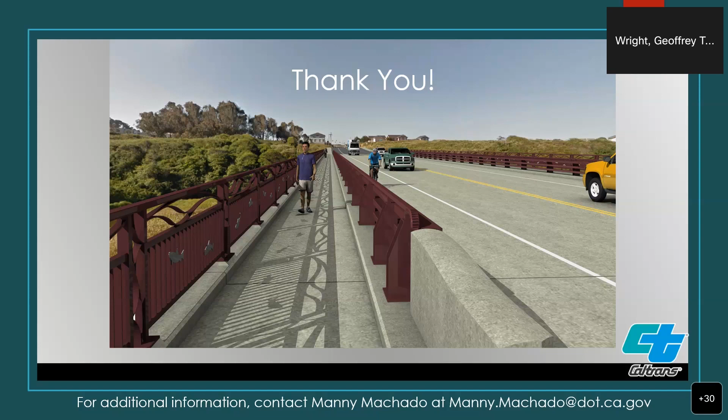Yeah, we probably need to defer to our contractor partner a little bit, but initial conversations with the contractor suggest that if given the notification, depending upon where we are with a critical pick, it could be up to 15 minutes from the time we are notified that we need to make a clearing to allow emergency vehicles to pass, to the time they actually could pass through.

I know there's been also additional discussions with the emergency services people, and they have developed a plan where they can have a side-by-side UTV vehicle that can access from the Pudding Creek Haul Road -- I'm sorry, the old Georgia Pacific Haul Road -- across the Pudding Creek Trestle, and transfer emergency gurneys and things like that in the event of an extreme event.

And so that is being contemplated, and emergency services have a plan where they'll be staging vehicles as needed to respond to emergency events as required. We've tried our best to develop a good plan here with the various emergency services, but to answer the question directly, we're hoping it would be 15 minutes maximum from the time there's a need to pass an emergency vehicle to the time that vehicle could pass, to allow the bridge to be cleared for that passage.

All right, thank you, Jeff. Our next question, referring to slides 7 and 8, this is from John Glidwell. I would like to request consideration regarding full road closures for those 10 days from 10 p.m. to 4 a.m. Is it possible to change those hours to begin after midnight?

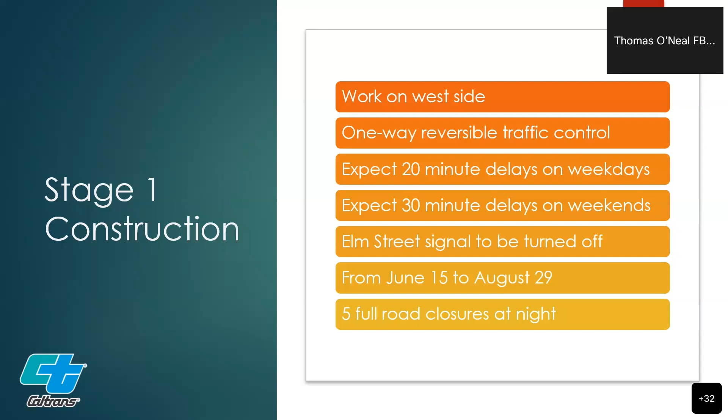Very helpful tonight. Our next question, from a longtime resident on Pudding Creek Road: I hope that Caltrans will put a stoplight at the intersection of Pudding Creek Road and Highway 1. At the very least, if no stoplight is scheduled for the future, then keep the speed limit at 25 miles per hour until further north past the intersection. So this resident is wondering, will there be a stoplight placed at the intersection of Pudding Creek Road and Highway 1?

I'm not sure if our traffic operations engineer is here. I did forward this question to our traffic engineer, and I don't have a response at this time, so we will respond after this meeting.

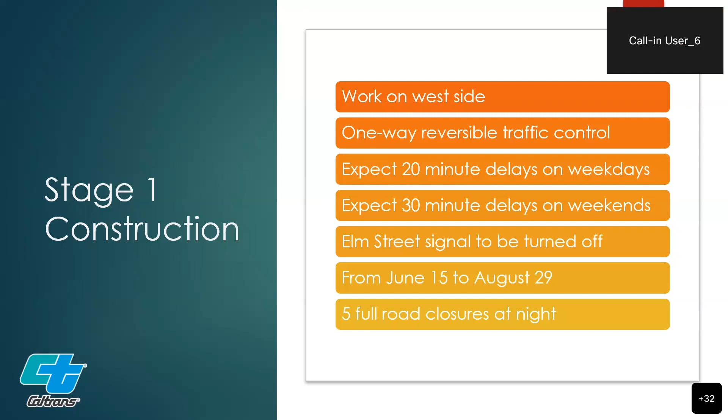I will address John's question. I don't think we really addressed it regarding the full closure hours from 10pm to 4am. We basically looked at the volume of traffic all night long, and from 10 to 4 was where the volumes were the lowest. If we went from 12 to 6, the volumes of traffic start increasing significantly. So that's how our traffic engineers recommended the 10 to 4 window.

Great, thank you, Karen, for that. Our next question tonight is from Linda: how will traffic backup on Pudding Creek Road be addressed?

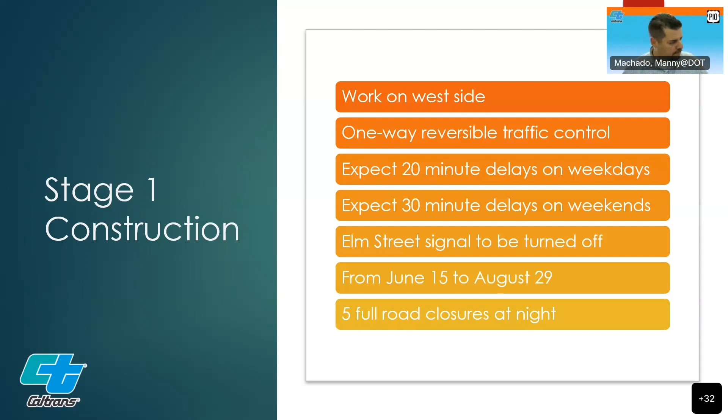Manny, this is Jeff Wright. If I understand the question right, they're wondering if, while we have traffic control in place, and they have an extended queue backup on Pudding Creek Road, how will that be addressed? We will have flaggers and a signal at the end of the bridge, and in the event we get extreme backups that can't be cleared by normal traffic operations, if it proves to be a persistent problem, we can implement flaggers to help clear queues. But with the current modeling, it suggests the queues will be minimal, and we rely on good courtesy of the public to allow vehicles to merge in. Hopefully that answers the question.

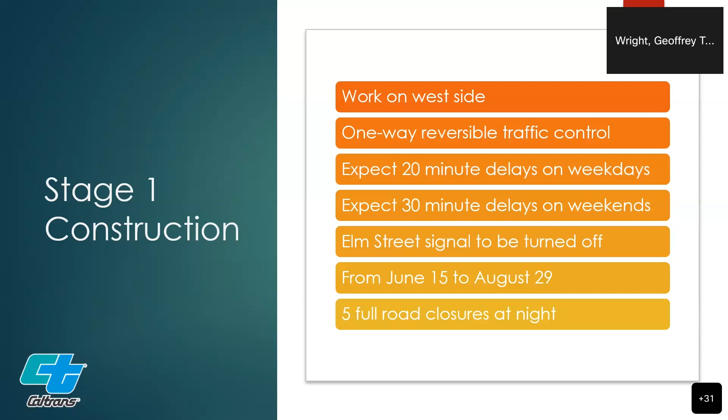All right, thanks, Jeff. Our next question this evening: why Pudding Creek Bridge and not other bridges on the Mendocino coast?

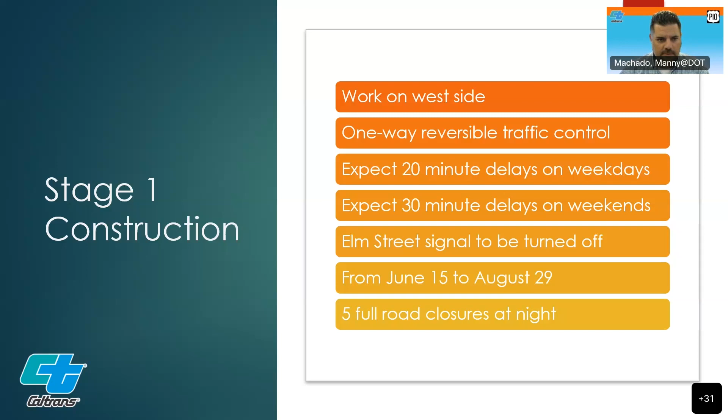Well, this project is a great candidate for widening. It has already been seismically retrofitted, and it has a lot of pedestrian and bicycle traffic, being just at the north end of Fort Bragg and connected to Pudding Creek Road. So this was a really good candidate project.

I'll just add to that one. Jamie Mattioli here, corridor manager. We do have other bridge efforts on the Mendocino coast. We have finalized design and we're advertising soon for Elk Creek Bridge, further to the south. Jack Peters Creek Bridge, we expect we will advertise fairly soon and would go out to construction next year. There are other bridges at various stages of development at Albion and Salmon Creek. So we're approaching each bridge by the needs of that bridge - what are the conditions, are there issues with seismic or safety or rails. Each bridge has its own story to tell in Mendocino.

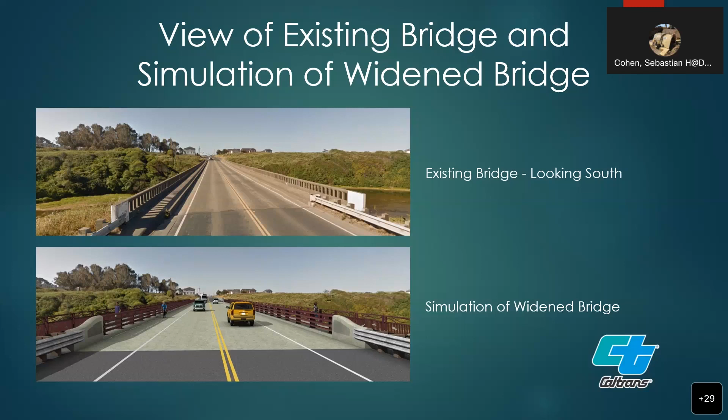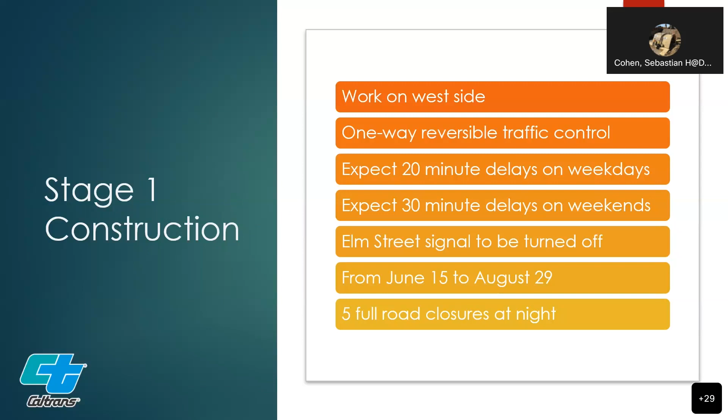I don't think we've had explicit coordination, because it was anticipated that the closures would be completed before school resumes, but we will reanalyze the schedule to see if we'll be impacting the school schedule, and we'll have a coordination effort with the schools. It may be that schools will need to work with us, in the event we still have extended closures, to increase their busing schedules consistent with the anticipated delay based on our traffic modeling. Our traffic operations branch isn't on this call tonight, but when they look at a traffic handling approach to a project and when closures are available, they do reach out and communicate with all the critical infrastructure, schools, that type of thing. So that was taken into account. But as Jeff said, if things change and we have an impact upon schools, we would definitely work to adjust to not have those impacts.

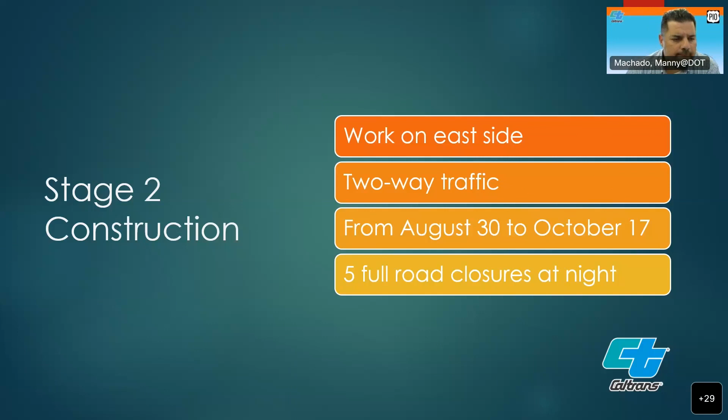Do we have the 10 dates for the full closures and the hours? Yeah, that's in the presentation. As Karen alluded to, that's the initial schedule from the contractor. Yeah, it's the next slide, Manny. Okay, perfect, thank you.

Just so the public is aware, we have a by-the-minute liquidated damage clause in our contract with the contractor as an incentive to make sure they're opening these closures on time. What that means is the contractor gets a financial penalty if they're not back open to traffic by the required time.

And we did have a comment that there are summer school buses, so we will definitely look into that.